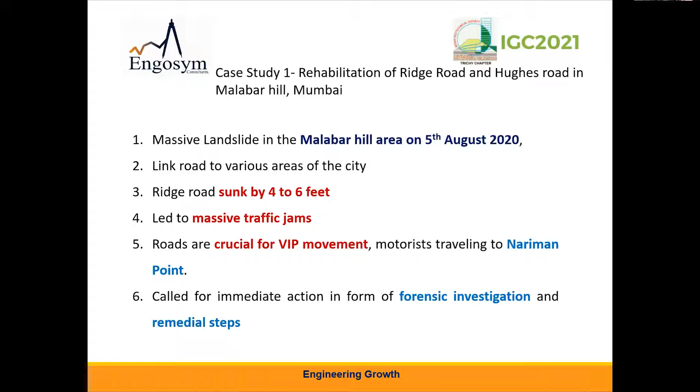I'll give you a glimpse of the landslide. We can see it occurred after a heavy rainfall downpour, which had been happening for 3-4 days in that particular time frame, that is August 5th, and one morning the caving in happened.

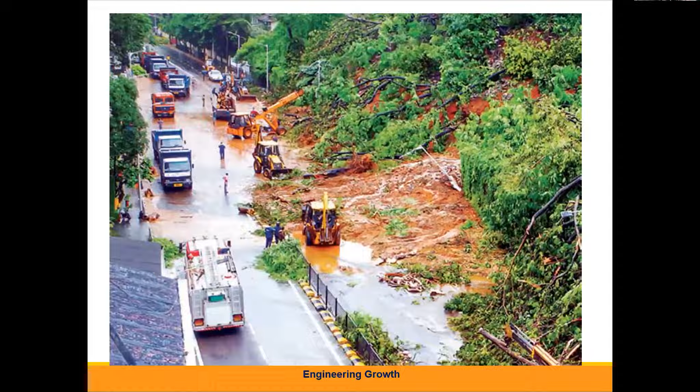We can see the whole slope came down on the road, and part of the road was closed - for certain days even completely closed, causing a lot of hindrance. This is the road above the landslide, which had huge cracks.

Now what was the cause? When we talk of landslide, we all come to a conclusion that the main culprit is generally water. And like any other slope, yes, here also the culprit was water.

So how did the investigation and remedial measures or design aspect move ahead? There was a committee appointed by MMRDA, the end client, that is Mumbai Metropolitan Region Development Authority. They appointed a committee which had IIT Bombay, other consultants, investigation agencies, as well as contractors, who assessed the probable causes.

What did the investigation reveal? There was heavy accumulation of water in the backfill slope, development of heavy pore water pressure because of the water accumulation. This weakened the hill slope and the existing retaining wall, ultimately affecting its structural stability, and the landslide occurred.

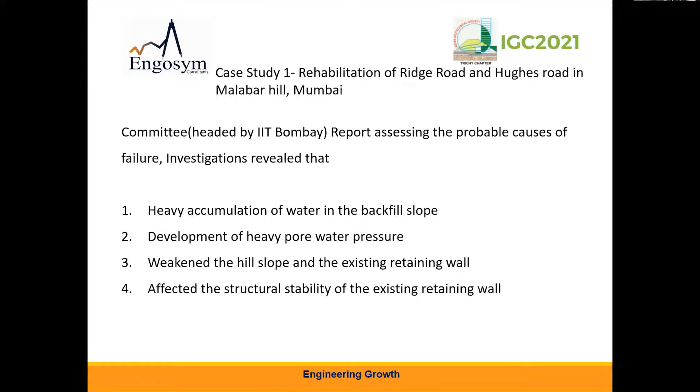Coming back - was there no study conducted earlier, or did it come on one fine morning? No. When we look in depth, there was an audit carried out, because other small reservoirs were being constructed around that area, and the audit revealed a need for slope stabilization, construction of a wall, as well as setting up protection nets for the landslide. A tender was also called, but then it didn't happen, and ultimately we had to suffer this landslide.

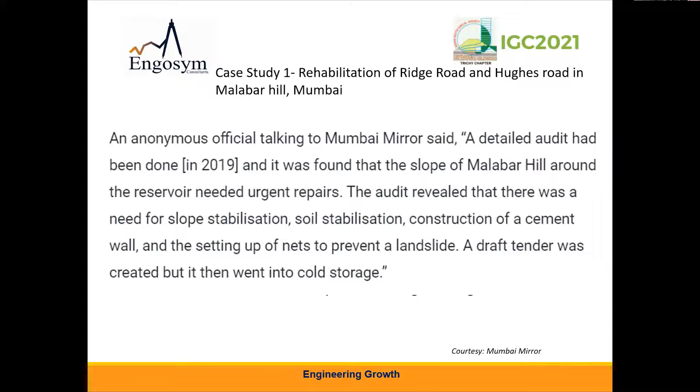This again is from the courtesy of the media. Now, what are the mitigation measures that were adopted after the analysis, considering we couldn't go for a very stable slope, because there is a road connecting at the top of the slope as well as the bottom of the slope.

The luxury of maintaining a gentle slope was not possible, so it was a necessity to construct or stabilize the slope within the available space. A retaining wall had to be constructed at the base of the slope. Space was limited, so we had to design accordingly.

The existing slope had to be dressed for whatever height to reach the upper road. It was observed that from Chainage 90 onwards there were steep slopes. The total road length that needed treatment was about 250 meters. So at the base of the slope, we needed to do a detailed analysis.

Accordingly, the base was stabilized. On the surface of the slope beyond the wall, we had to adopt erosion control measures as well as stabilizing measures. Erosion control mats were provided on the surface of the slope, reinforced with steel mesh. The slope was strengthened with grouted nails, and subsurface drainage arrangements were provided.

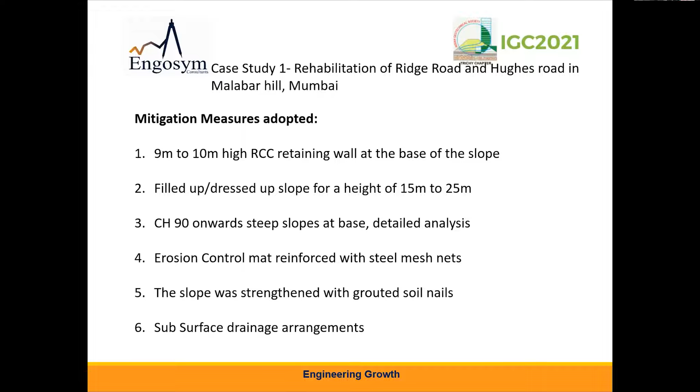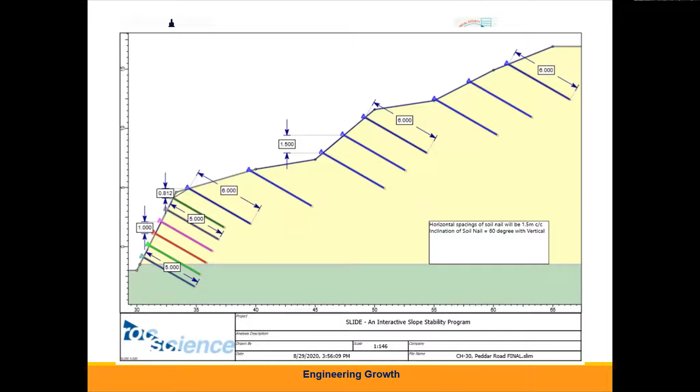Okay, so who provided that? Let us have a look at the photographs. These were some glimpses of the analysis that were carried out. Investigation was done, so accordingly water parameters and pore water pressure were considered in the backfill, and nails were designed. We used commercially available software.

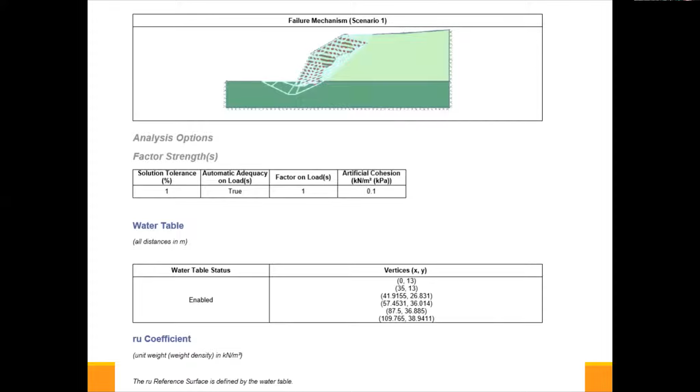Now this was a typical cross section. I'm just taking one particular chainage, of course it was changing as per the requirement along the stretch length. We can see that the top of the slope was treated with erosion control mat on the surface. Nails were driven and pins were provided in between, and a wall was provided at the base of the slope.

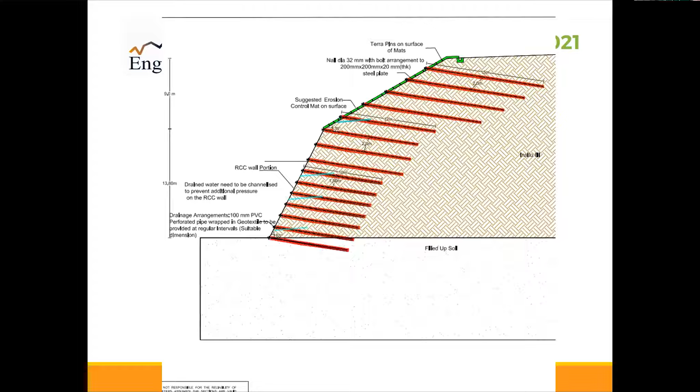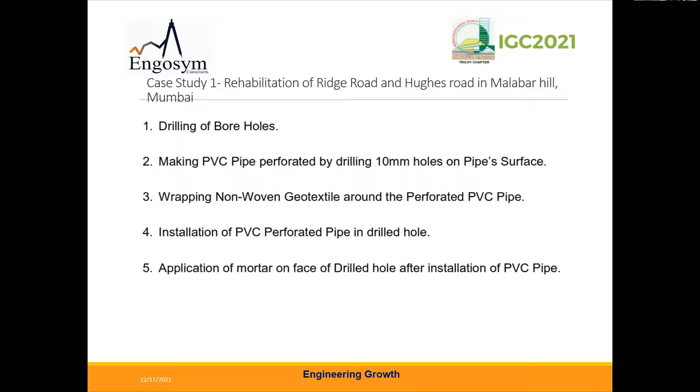Now how did we do the drainage arrangement? Drilling of boreholes - the PVC pipe had to be perforated on the pipe surface at the site itself. Wrapping of geotextile around the perforated pipe. Installation of the pipe in the drilled hole, and we had to pack the face of the drilled hole so that there is no reverse movement of water. These are the perforations and insertion.

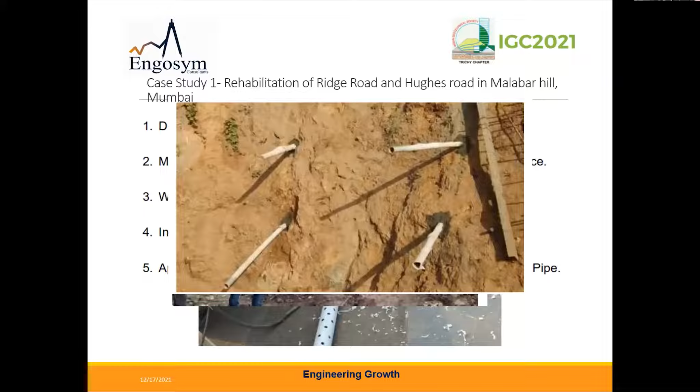This is the typical arrangement. Now this is the dressing of the slope, and erosion control mats are provided to prevent surface failures or to take care of local stability at the site. These were again reinforced with steel mesh, hexagonal wire steel mesh.

On the surface are the anchors that you can see, which have been driven and then tightened with the base plate and nuts. Now this is the construction of the retaining wall simultaneously at the base of the slope, viewed from another angle.

This is after vegetation had started coming up at the site. This is a panoramic view of the area - the wall, and then we have the slope. At certain locations, we had to provide flexible gabions at the base as well.

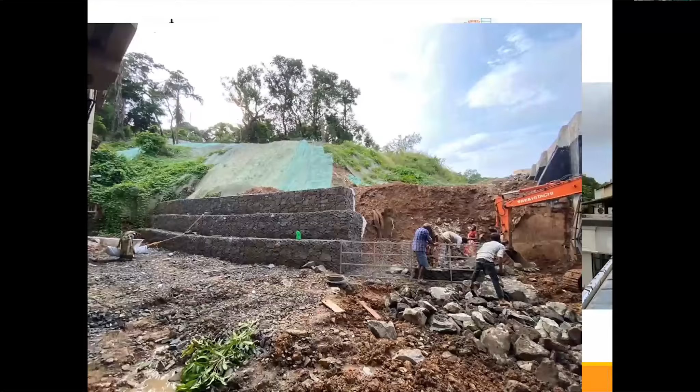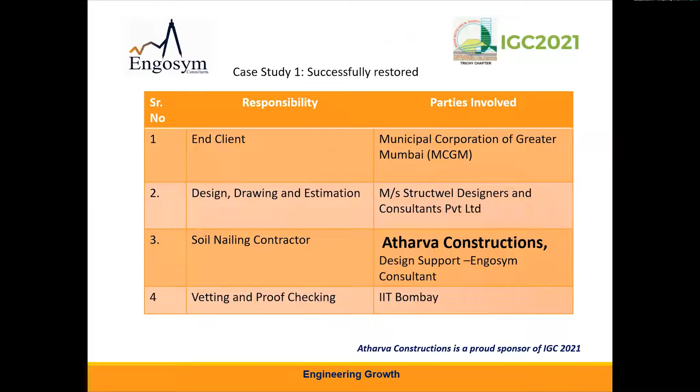Now coming to this, the slope was successfully restored. The end client was here - MCGM, as I said, and even MMRD was also involved. The design drawing was given by Structwel Designers, soil nailing contractors supported by Engosym, with vetting and proof checking by IIT. Finally, the road was reopened 10 months after the landslide.

So this is the first case study we saw - what were the causes and how it was addressed. Coming to the visible challenges in hill roads, as I said, hill roads call for collaborative work from different fields of civil engineering - not only geotechnical, even rock experts have to be involved. We need hydrological and hydraulic experts as well.

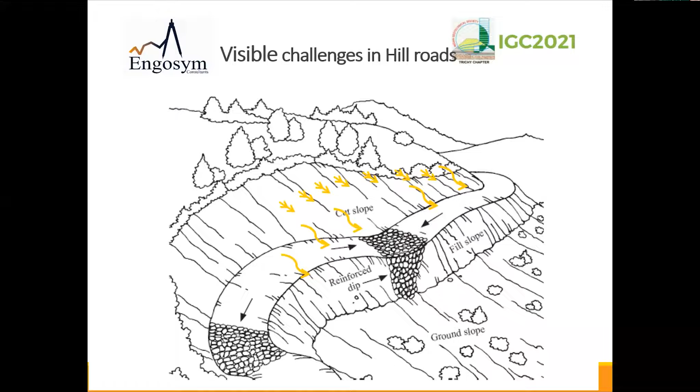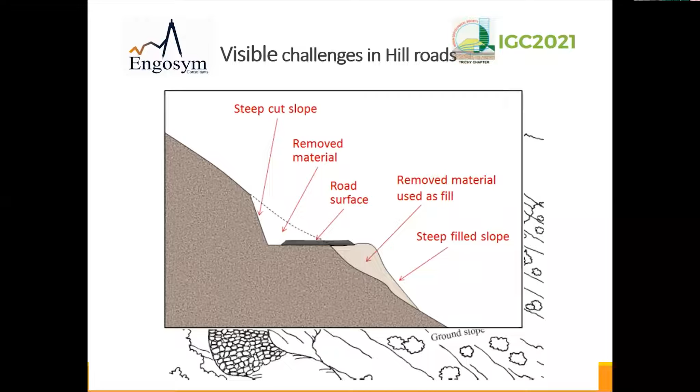So it comes as collaborative work. When we talk of visible challenges, the surface flow from the hillside is a typical image we can imagine. We have flow from the hillside, an embankment, followed by the valley side. This is a typical arrangement where we have to cut on the hillside, and because of logistics and viability or feasibility of the project, we have to use the same cut material on the fill side to widen the existing embankment.

Now coming to what are the mechanics of slope failure, or how does it happen. When we talk of hillside, it will be either the young Himalayas, or on the west coast we have the lateritic belts. And when we talk of the eastern coast, it again has a fragile kind of strata.

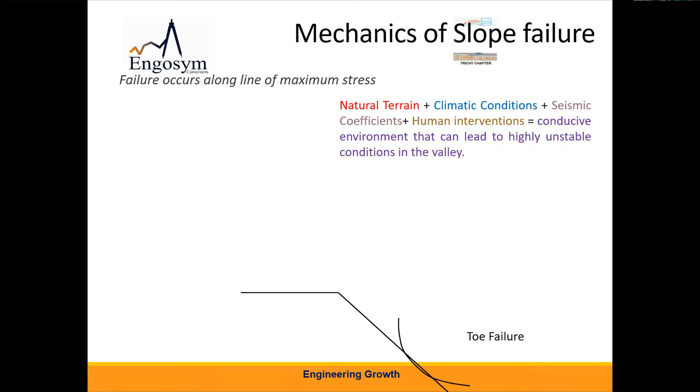So natural terrain, climatic conditions, seismic coefficients, human intervention, all together form a conducive environment that leads to highly unstable conditions in the valley, which leads to slope failures, either at the toe or a general slope failure, or a deep-seated failure, which we address as global stability issues. Now we have this wonderful guideline, SP 106 2015, which gives the landslide remedial measures.

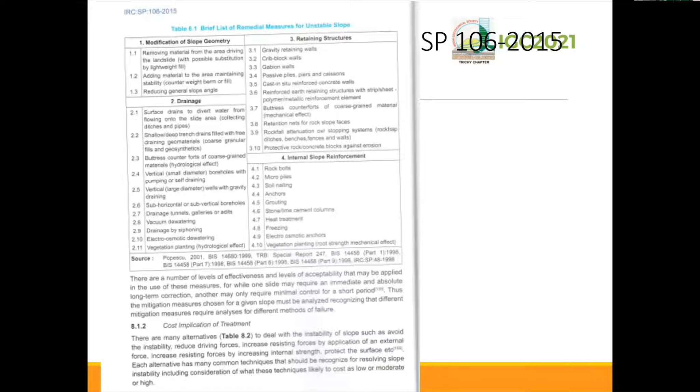There are different ways in which we can address issues related to landslide, which varies from modification of slope geometry, drainage, retaining structures, or internal slope reinforcement. It also states the different options and their implications, either technical or cost implication point of view.

Now what are the slope requirements? The solution requirement in such conditions predominantly - of course it is not applicable to each and every case, but if these requirements are met, then the solution could be a comprehensive one.

So we need to have a permeable and free draining structure, because heavy surface runoff adds to subsurface saturation. So it is good to have a permeable and free draining structure, environmentally friendly, flexible, with good speed of construction. Cost of construction has to be optimized, and let us try to use locally available material as much as possible.

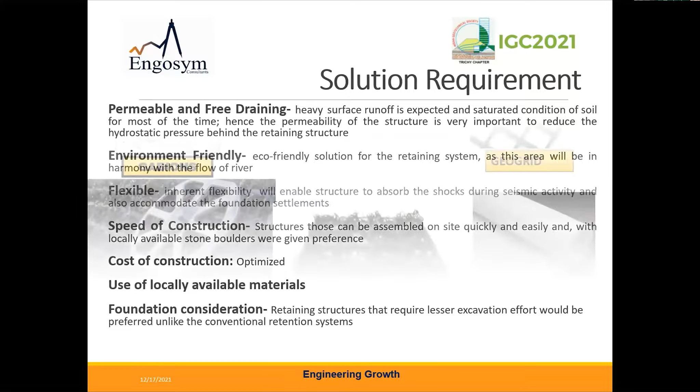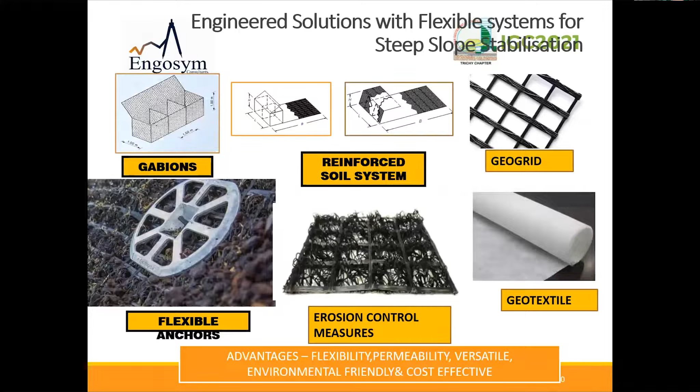And foundation consideration - as we are already working on hill roads, the necessity is that excavation should be as minimum as possible. Now these are some of the products which are invariably used. I'm not going into detail, but gabions, reinforced soil systems, geogrids, flexible anchors, erosion control measures, geotextile.

So taking the presentation ahead, let us look at case study 2. As I said, case study 1 was from the west region. Now case study 2 is from the extreme east side, or you can say the northeast state of Mizoram. So what we did there, what was the condition, and what was adopted.

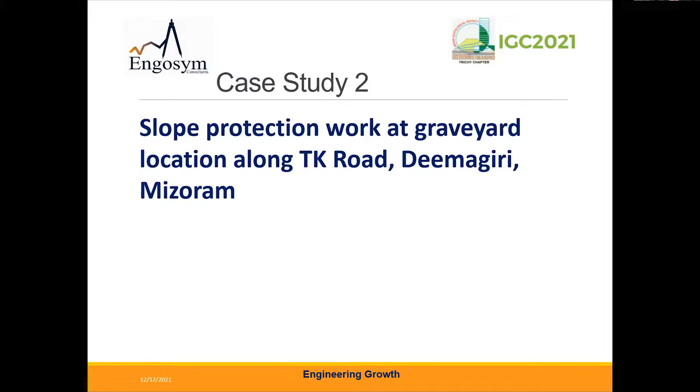So this is a typical case of Deemagiri area, TK road, an internal road maintained by the Public Works Department. If you see in this image, at the top you can see certain structures - top of the hill slope there are existing structures. Already there were some measures being carried out at the base of the slope.

So initially the department constructed rigid retaining walls. Further, they felt these small toe walls at the base were not sufficient, so they extended it by constructing 2 or 3 layers of flexible gabion retaining wall. Still, the stability issues were not getting addressed.

Though after looking at the site and the parameters, we did the investigation at the site, looking at the parameters of the fill material on the slope. We found it was more of a local or surface failure that was happening, and it was not possible to dress the slope at a gentler inclination because the structure at the top is a graveyard.

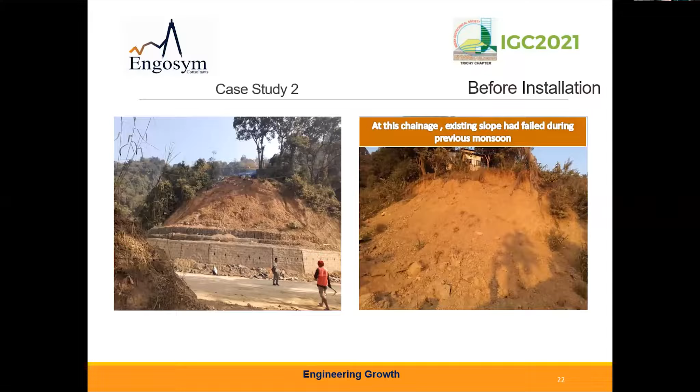So it was at this chainage, as I said, the slope failed during the previous monsoon. A graveyard at the top of the slope posed a challenge, so because of that we had to deal with whatever space was available.

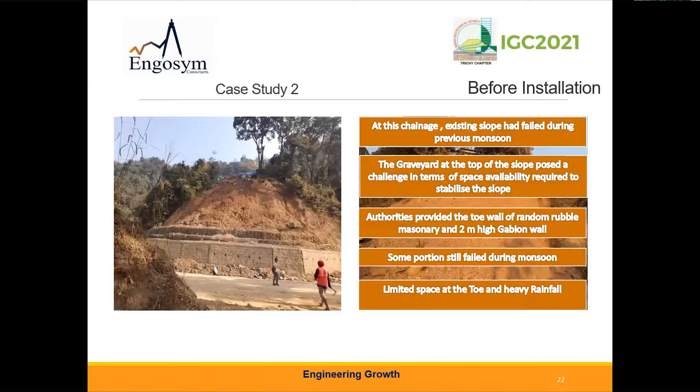These walls were already constructed at the base. There was no point in removing these walls because they were serving the purpose of toe stabilization. So what could be done with the limited space at the toe, and we have the issues of rainfall - we adopted this measure of taking care of surface stability with the help of a turf reinforcement mat that was draped on the surface of the slope.

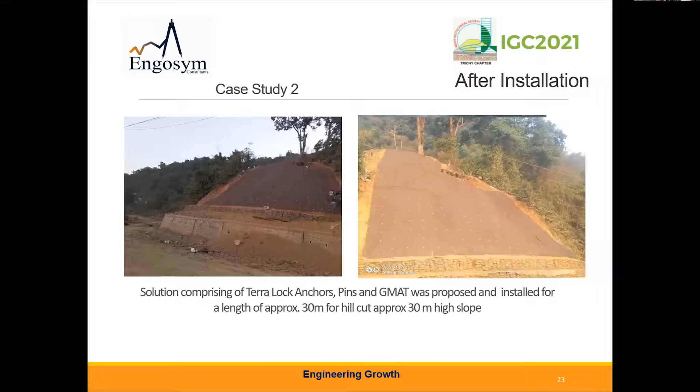Now along with this turf reinforcement mat, we had driven Terra Lock anchors. These Terra Lock anchors are flexible anchors which can be driven to a certain depth based on the requirement of the stability of the slope. These were designed, and the space in between the anchors was stabilized with pins. So we used this system.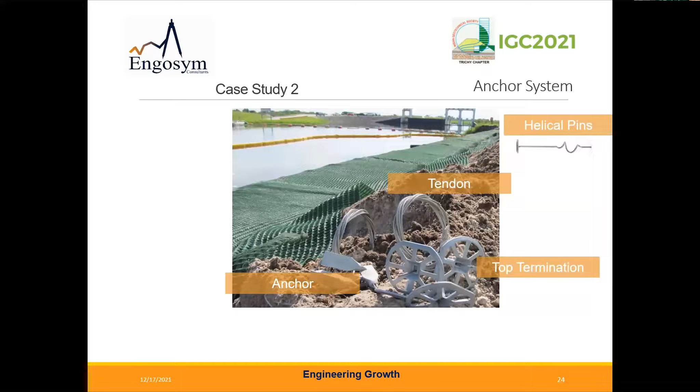So a typical cross section, as I mentioned, was more about taking care of the surface stability of the slope and ensuring the surface is not exposed to continuous weathering. The existing toe wall is maintained as it is, the surface was draped with the mat, and anchors were driven to capture the surficial sliding failure and absorb the erosive forces.

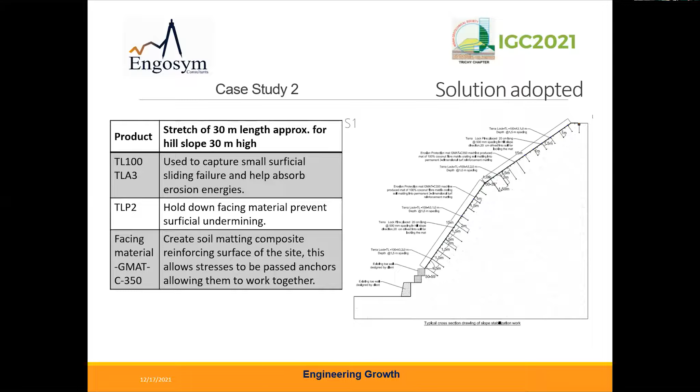So these are some of the images during installation.

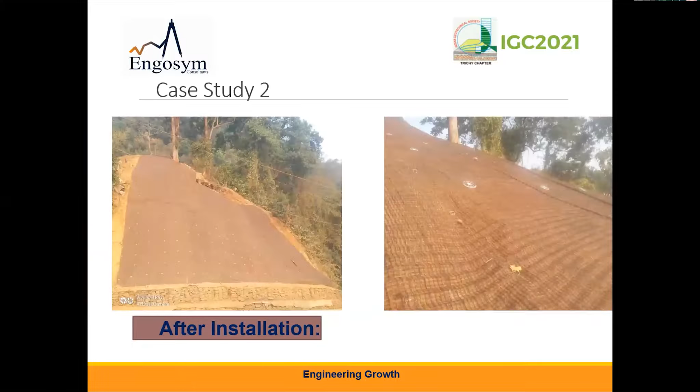So you can see the closer view. Here the end client was the PIU unit, that is the project implementation unit, PWD Mizoram. The design, drawing, and estimation was given by Gripple. Approving consultants were Shilladia and executed by local contractors.

Now this is the image of the current site, or you can see how the current site is. Of course, it is not a very nice or very disciplined vegetation, but yes, the slope is stabilized.

But when we are doing certain study, if we get some warning signs, that needs to be taken up seriously. Initial stage of the project, that is DPR, which consists of study, risk analysis, as well as a financial guide that is given by the DPR. The working out of the DPR itself needs to be given its due diligence. This can take care of a lot of problems related to slopes at a later date.

Quality and optimization, definitely, when we talk together, the terms quality and optimization, it's a challenge, but yet achievable if the above steps are taken seriously. Adopt advanced technology and take benefit of the technically superior solutions.